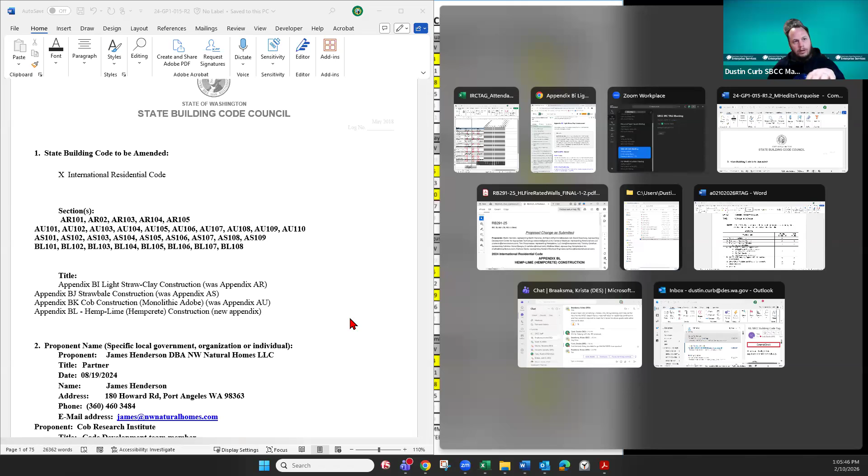So we will move to number 4 in the agenda. At the last meeting, we discussed an appendix proposal that got missed by staff during the Group 1 window. It's an IRC proposal that should have been included in the Group 2 bunch. We had some good discussion at the last meeting, and we needed some revisions to make these appendices fit the character of Washington. Of note, I worked out with Krista before sending this one out to the proponents, getting correct energy code references in here. So we have here all 4 appendices in text format on the attachments for today's meeting.

On the left is the R1 version that is posted. On the right, I have some additional edits beyond the energy code references by Martin Hammer, and his are highlighted in turquoise - they were uploaded today for the meeting. But first, I'll run through the energy code references and also these changes to the user note. The original proposal said to strike the user note that says it's not mandatory unless specifically referenced in the adopting ordinance. It's my understanding that we are trying to get these adopted statewide so they can be used across jurisdictions, so I modified the user note - the provisions contained are adopted in the state of Washington.

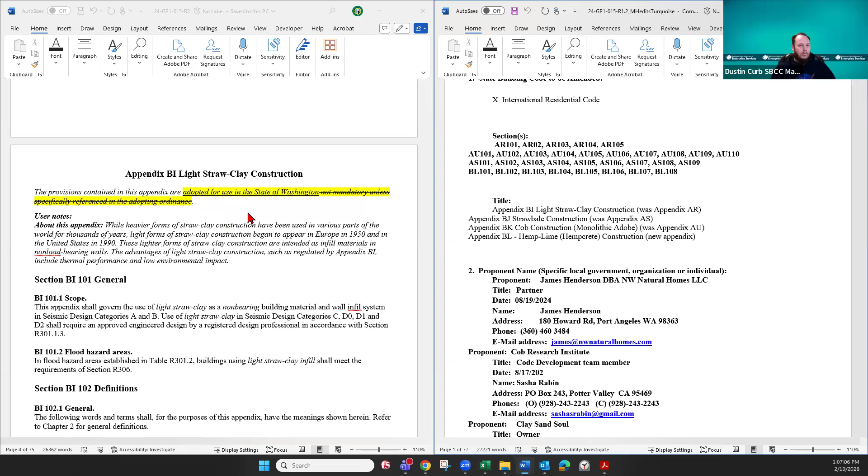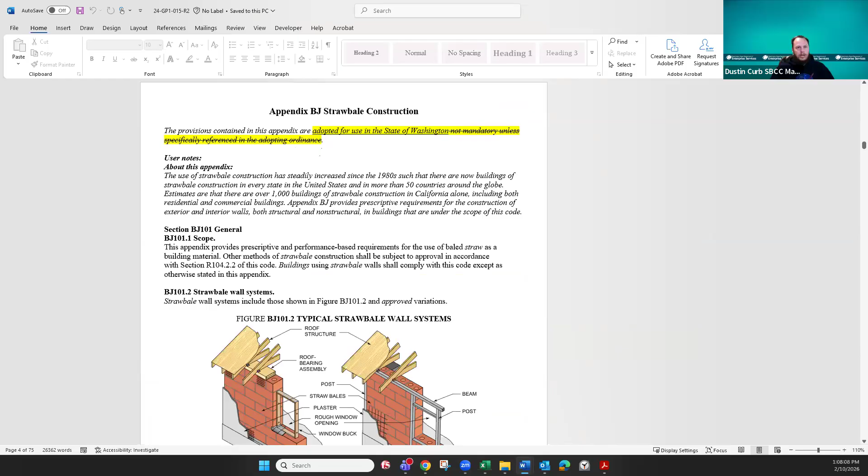Moving through here, the changes I've drafted are in yellow. We have section BI 104, thermal performance. I got with Krista on these to identify the appropriate energy code references, so you'll see those changes in underline and strikeout. One thing to note is a comment here from Krista: the residential energy code tables don't contain a value for mass walls, so they're required to meet the above-grade U factor from table 402.1.2. So it changes from the R value requirements to U factor requirements in accordance with the state energy code, and those changes are made through the other sections as well since they're very similarly written to reference the same tables. We have Appendix BJ, the adopting ordinance statements changed there.

We also, with some additional discussion with the proponents and with Krista, identified that the climate zones 6, 7, and 8 do not belong in this appendix because in Washington we have zone 5 and zone 4. I believe it's 4C and 5B in the tables for these climate zones. So striking the ones that aren't applicable makes this more composed for Washington State.

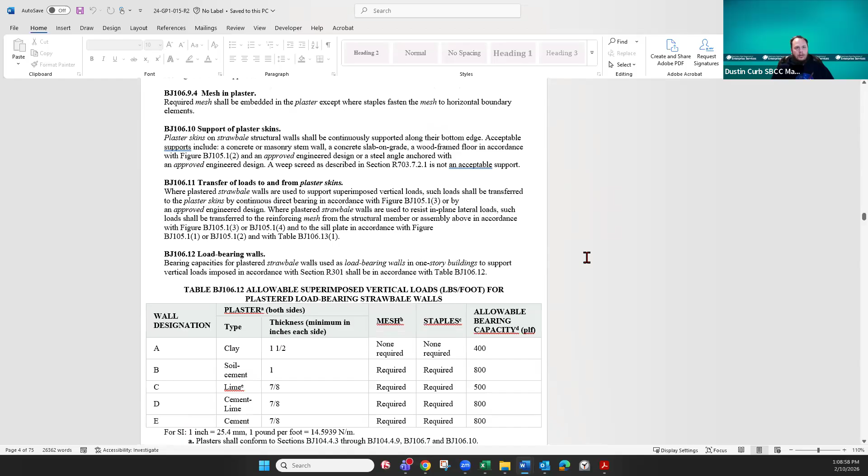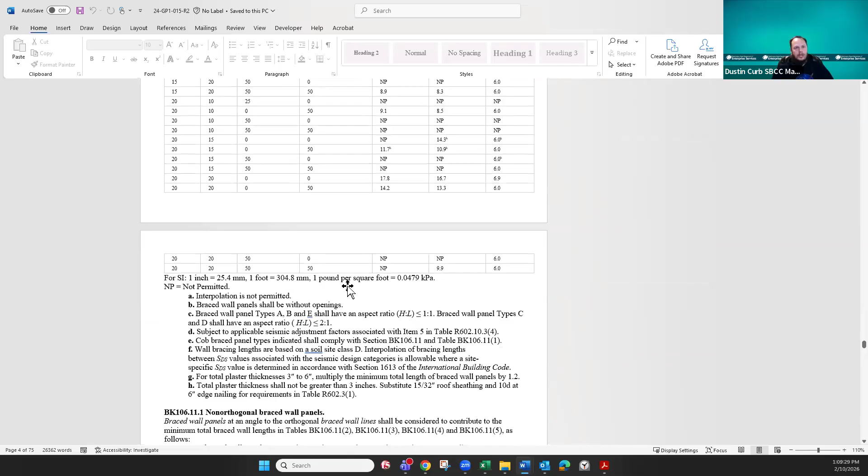We have some other climate zone changes here, trying to catch all of these. Another appendix, the BK Cob, the adopting ordinance statements changed. Then we have the other climate zone 5B noted at the table. This is just aligned with the Washington State Energy Code. There's not too much more in here, just a couple more highlighted sections showing the same types of changes.

And we're into the hempcrete appendix now. Yeah, the climate zone change, the mass walls change. I believe that's the last change that I was able to draft into here. And along with this, in response to some of the comments heard at the last meeting, we have changes drafted into this version in addition to these energy code changes.

And I'd like to maybe turn it over to Martin Hammer to discuss these. Martin, if you like, I can promote you over if you want to share any sort of screen. I have this document on screen on the right-hand side, and I also have the ICC code change proposal RB 291, two different versions. If you want to present those, I'd be happy to pull them up for you as well.

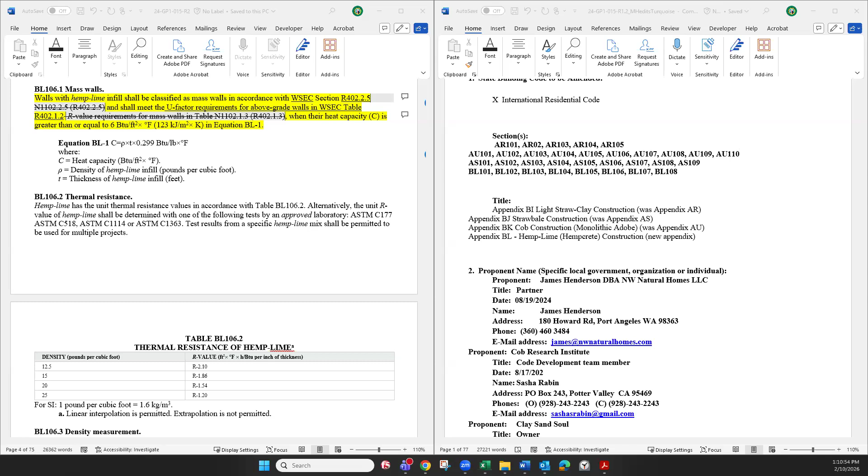If you could pull those up, that would be great. You want to start off with those? Sure. Well, you want to go with the comment 3-5 one or the final? Oh, you're talking about the ICC document. So how about I pull down this one? I'll just make this screen dedicated to what we got going on.

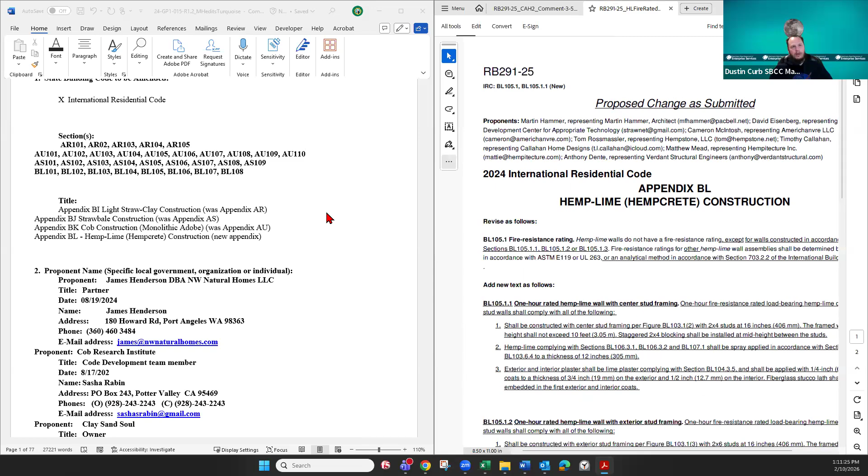So this is Martin's updates in addition to what I was just showing. They'll be highlighted in turquoise. And then I have the ICC code change proposals here on the right-hand side. So if I'm ready to show any of them, would you like me to scroll down to the first change you have in your proposal document? Yes. Okay. All right.

Between Dustin, and I forget the person mentioned regarding energy code, and myself with my colleagues, we've in combination, I think, addressed all the issues that were both discussed in the last meeting two weeks ago, and that reflect differences or make the code language compatible with Washington State's codes and conditions. So, as Dustin mentioned, I submitted a document with proposed changes in turquoise. Before I go through them one by one, I'll say that they fit into a couple of categories.

One is this one you see, the first one. Each of the four appendices now has a special inspections section. We discussed that last meeting. And then the others, in terms of category, we added the hemp lime tested fire resistance rated assemblies that were tested and recently approved in the ICC code development process. And there were a couple locations where the International Residential Code or International Building Code are referenced in the IRC appendix, and I changed 'international' to 'Washington State'.

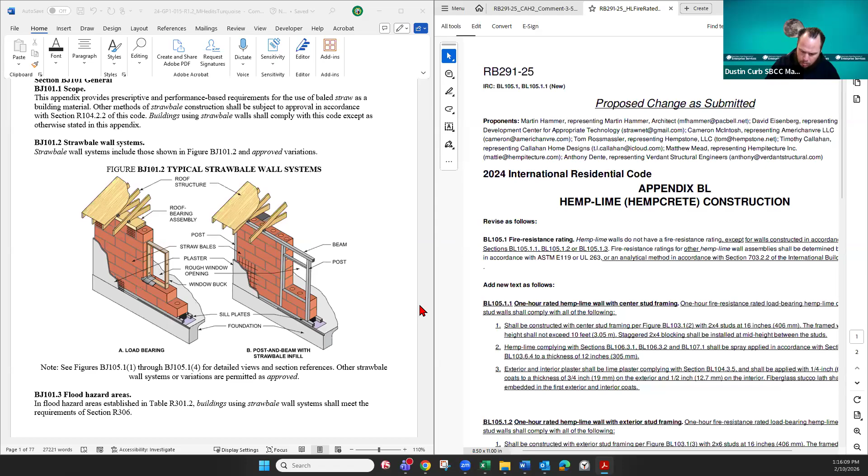Okay, so anyway, a bit of an aside, but if you can keep scrolling. Yeah, one moment, let me take a note on this as well for my records here. All righty. I mean, if they look more like that. Yes.

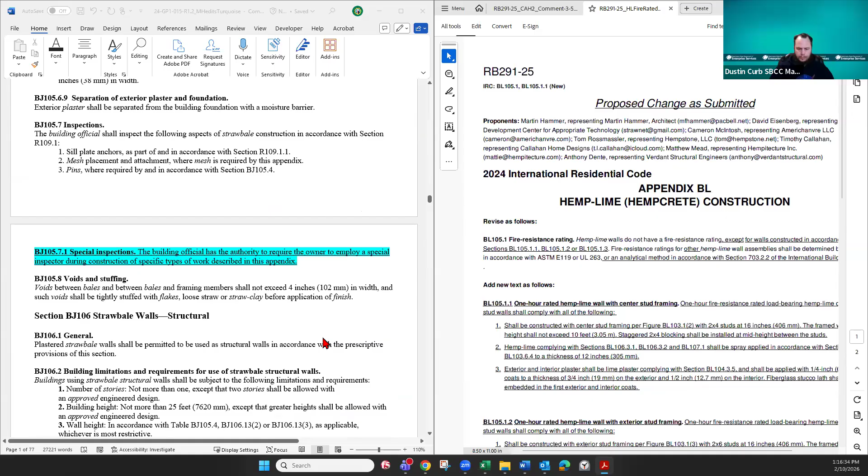There's okay, here's another special inspection section. Exactly. I'm going to keep on rolling. Yes, keep on going, yes please.

Okay, it's a Washington State change. Yeah, there's an example of changing international to Washington State. And another one similar.

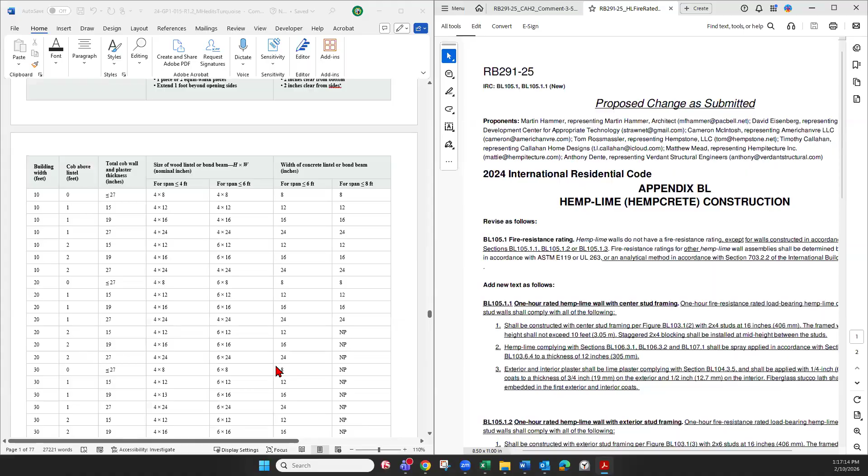Another special inspection section. International to Washington State, same thing. One more.

And if you can go back to the beginning of the hemp lime section, thank you. While we're here as well, I just wanted to say that I've discussed this with David Eisenberg, but I think all of us, I definitely appreciate the language that you're proposing here. I wish State of California would use the same. We've had some difficulties with them not being so clear as this is. But I just wanted to comment that I think this is the perfect way to say what you're trying to convey to the code user. So thank you for that. And you can keep scrolling please.

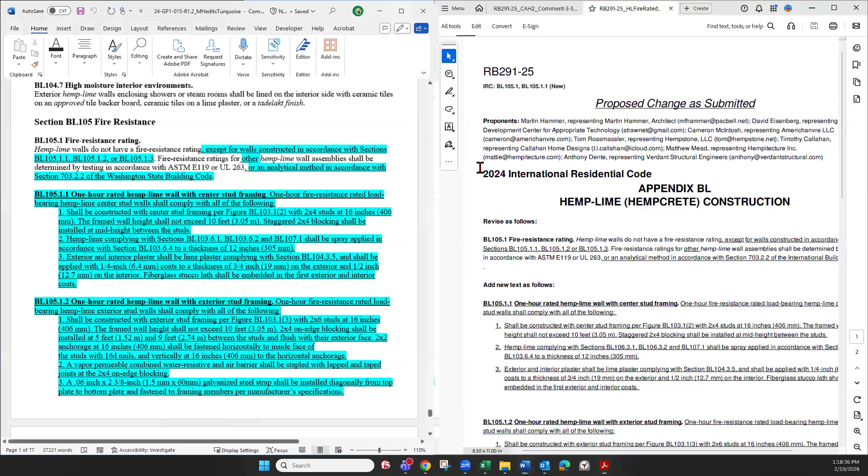Again, the special inspection section. Okay, now here is certainly by far the largest amount of code language, and this is what was recently approved in the ICC code development process.

The current IRC, well you can see the difference between, especially in the first section where it says hemp lime walls do not have a fire resistance rating. But now with the recent approval, they do, at least this will be in the 2027 IRC.

And I appreciate the tag's willingness to take this approved language that reflects recent testing in the last year or two that was done on 3 hemp lime wall assemblies. All of them performed very well and achieved a 1-hour fire resistance rating. So that's what this language in turquoise here reflects, those 3 assemblies.

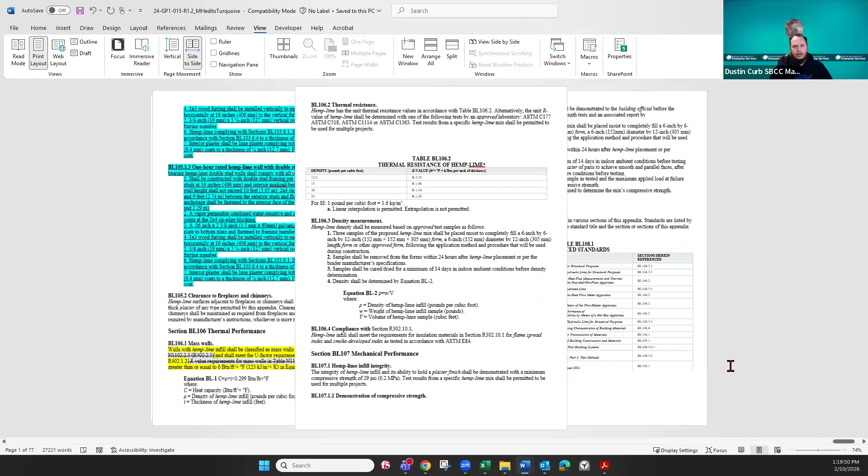And I think that's the last change you have in this document, correct? Yes.

I guess to the tag, is there any sections you'd like to discuss? I feel like the one we have on screen probably might garner the most, but Quinn?

Yeah, so I have one comment and one question. The comment is that the proposal at the ICC level hasn't been approved yet. So that's just a simple correction on the statement because April is going to be the public comment hearing. It did pass the committee action hearing number two, but it hasn't passed the public comment yet. So that's just a minor correction.

My question is on section BL 105.1.1, under item number two, for the spray applied. My question is on the inside or outside? Because typically in 302.1, the requirements for a rated wall would be it's protected on both sides. So I'm curious if this test was done on the exterior, interior, or both. Question for Martin. Oh, okay.

So Quinn, 2 points. First, to your first point, it was approved, but in the committee, the second committee action hearing. So I should have qualified that. Approved was the right word, but it hasn't been approved at that final step, which typically, well, the final step is in a couple months in April at the ICC hearings in Connecticut.

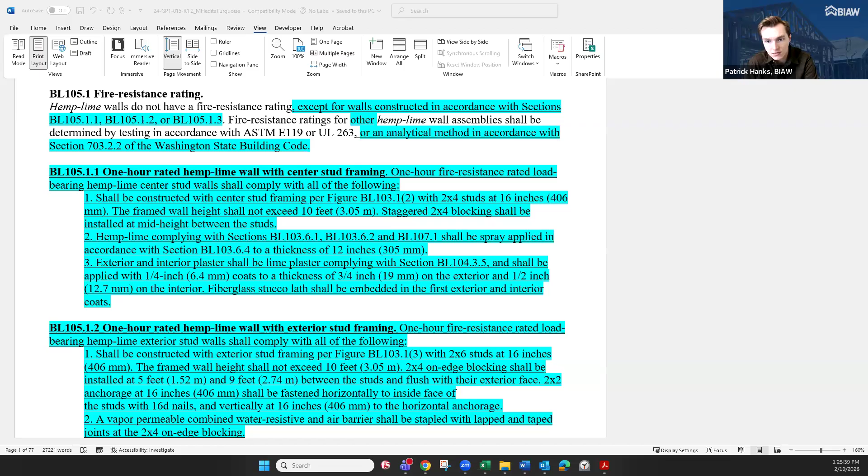Patrick: one other thing we brought up last meeting is I don't know if we want to do this individually for each appendix, but if we move forward approving them, we'll need to edit WAC 51.51.003, which is the chapter 1 part of the state IRC that has what appendices we've adopted. So I don't know if we want to include that in each individual proposal, or just direct staff to include that in a final motion if we proceed with these. I'm happy to bring it in as we get to the end of this one. I can pull the language over and keep it in and put it in the draft as well.

Annie: just want to circle back around to seismic design categories. As I understand it, light straw clay and hemp lime are non-structural, so whatever system works is what works. Straw bale specifically applies to A through D2, and cob applies to A through C seismic design category. What are we doing about those silent seismic design categories? Is there just an assumption that there's going to be an engineer doing it, or are they simply not allowed in those zones?

This is Anthony with Verdant Structural Engineers. It's cited that an approved engineered design is required, and if that approved engineered design kicks you into the IBC, and if that is an alternative submission, that person would need to go through IBC 104.11 alternative submission for that. But if it's a code compliance system they're using, say moment frame or brace frame, then obviously an alternative submission would not be required. But an IBC approved engineered design is required, and that's cited for all of them. So there is not an unspoken category that doesn't relate to that.

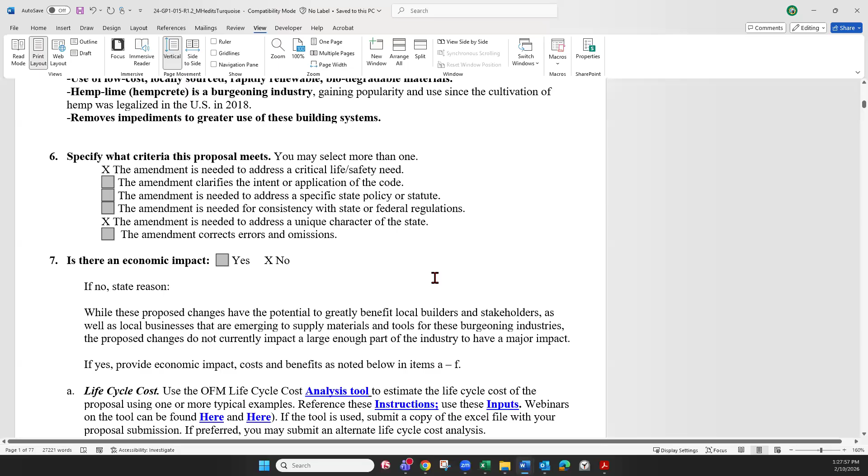Okay, thank you. I did notice that the wall panel types in the straw bale and the cob are actually A through E, which can be a little confusing because our seismic design categories are A through E as well. We need more symbols for variables. I agree, it's not ideal.

Any more comments, questions from the tag to the proponents?

So this is a good screen to look at, Dustin. In BI 101.1, it just talks about the use of light straw clay in seismic design categories C, D0, D1, and D2 shall require an approved engineered design. To me, it's silent on E unless it's somewhere in this section. If we can make a statement on that—I believe there was discussion last meeting, and I meant to follow up on this. Previously, the IRC did not apply to E, so the code as a whole is silent on E. But I believe there are some allotments for that now, and we could either put E at the end here, or no matter what we say, it's the same thing: the use of language in the code here saying approved engineered design.

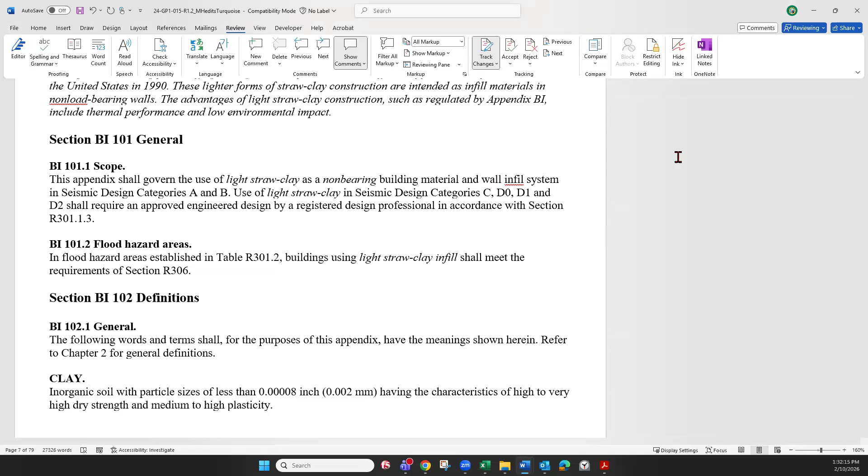And then I'm assuming that there's other locations in this document where this same change needs to be made. Yes, and I can find those right now if we want to move on to the other question.

Angela, I just had a question. So seismic category E is being introduced in the 27 code, correct? But we're bringing it into the 24, is that right? Or did it actually come in the code? It's 24, it's coming in 2024, and Washington State does have a couple areas.

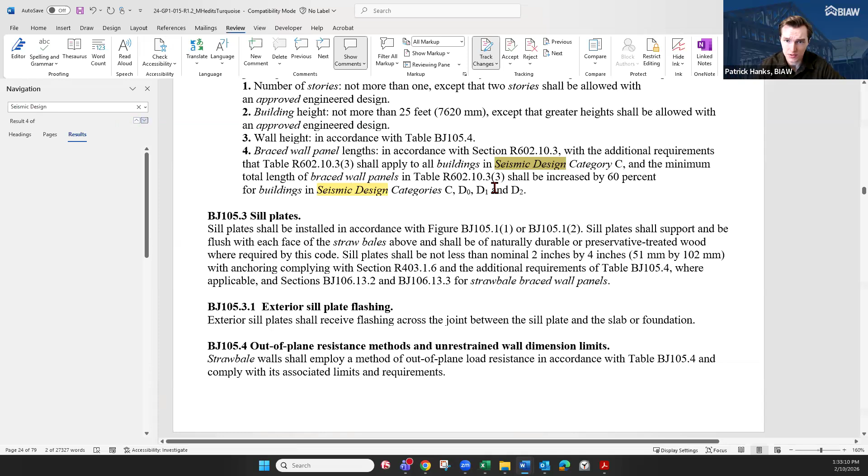The other parts of the code allow them to build, I think, to D2 if they do certain things, but it's probably better if we just clarify in here. We just include E.

That's what I was wondering, was changes were made to this appendix for the 27 code by these proponents, but they didn't change this or vet E going through this. So I just was curious why, if they were already making changes, they didn't also actually make that change and get it vetted at the national level. But that's just a question.

I don't think it comes up very much because most of the country doesn't have E. It's just us, where it's like, we care about this because it affects us.

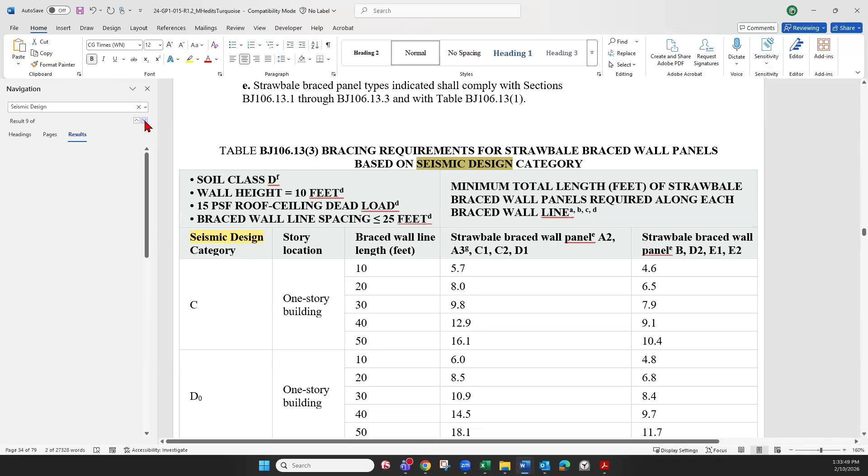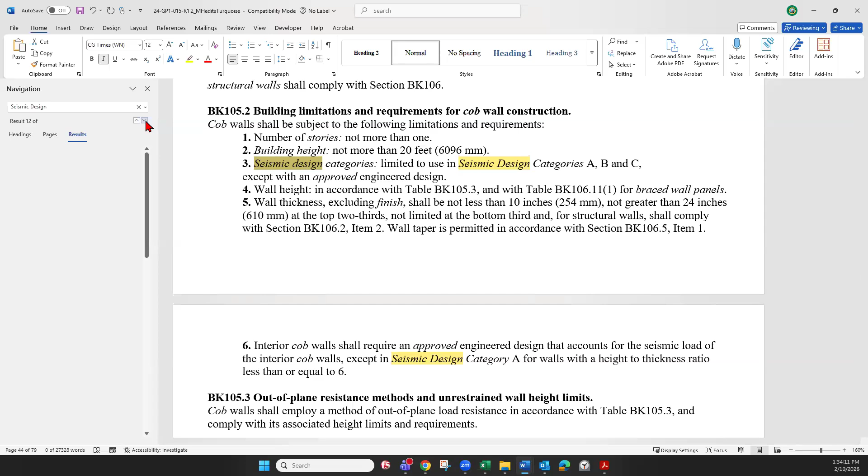Also, Angela, maybe the more important thing is that there's no vetting required to write E after this, because it's essentially saying that you need to get an independent engineering design on this. So it's not approving any structural applications of these appendices for use. In fact, it's explicitly saying you can't. You need an approved engineered design and can't use the structural tables below for E. So no vetting required.

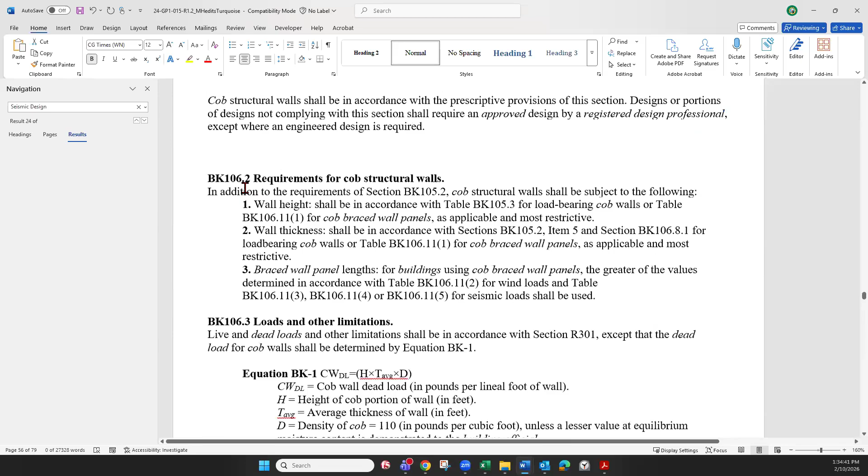BJ 1052 is BJ's version of this category, and it's item 4. And since you're in BK 1052, it's the number as well, and it's item 3. Here, it's actually more simple.

I don't know if we actually need to address it here because it simply says, like everywhere else, an approved engineered design. But if it's preferred by the TAC here, we could just simply use the same language. I hadn't actually realized that there was slightly different approaches to saying the same thing between these appendices until this conversation.

Does anyone care about leaving item 3 just simply as it is versus listing out? I mean, it makes sense the way it is to me. I think that just comes down to making sure that people are trained and understand what it means.

You can probably just go, Joshua. I think Dustin's editing the document. Perfect. All right, thank you. Angela's not watching.

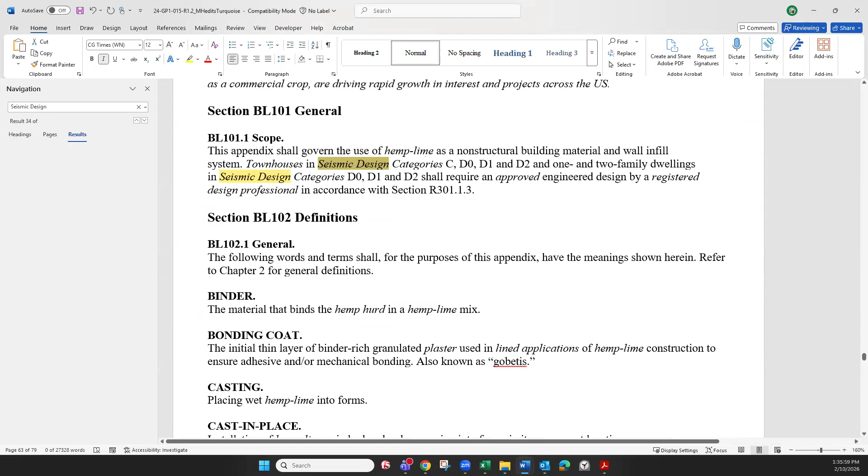I was just going to say the one thing that seemed a little different, unless I'm not tracking right, but in the cob houses there were some prescriptive standards for A through C. So I think that language makes sense because I was saying we are allowed A through C, or you need an engineer, whereas I believe the last one was any of these categories, you need an engineer, period. So I think the cob house made sense. I was just voicing my support for that.

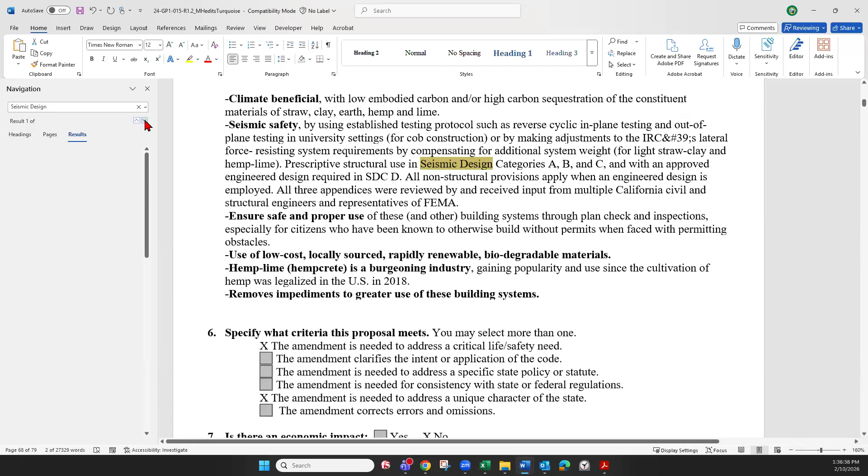Thanks. Yeah, and Martin, did you have something? Yes, a few things. First of all, I concur with this approach that we're doing right now. I think this is the right solution, and I did verify for myself that category E is in the 2024 IRC, which was published more than a year ago.

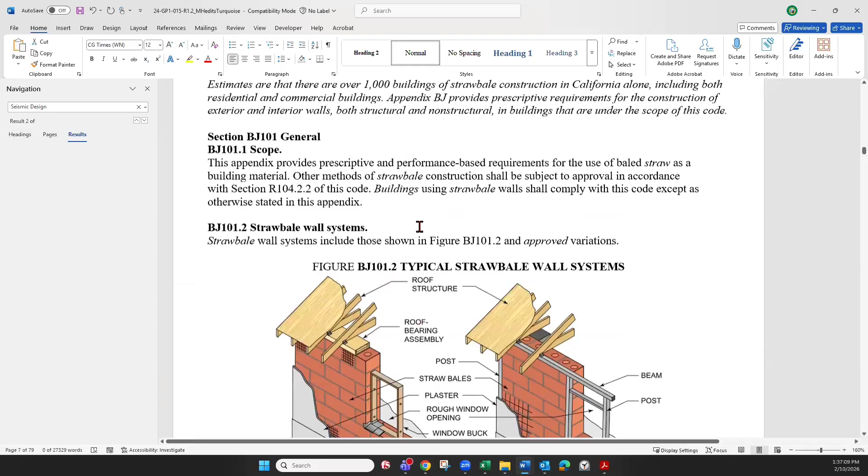So, and then if in BJ, if you can go back, well we have it for BI. In BJ there was one more change where E is needed. You need to insert E, I think, or I might be losing track here. Hold on a second.

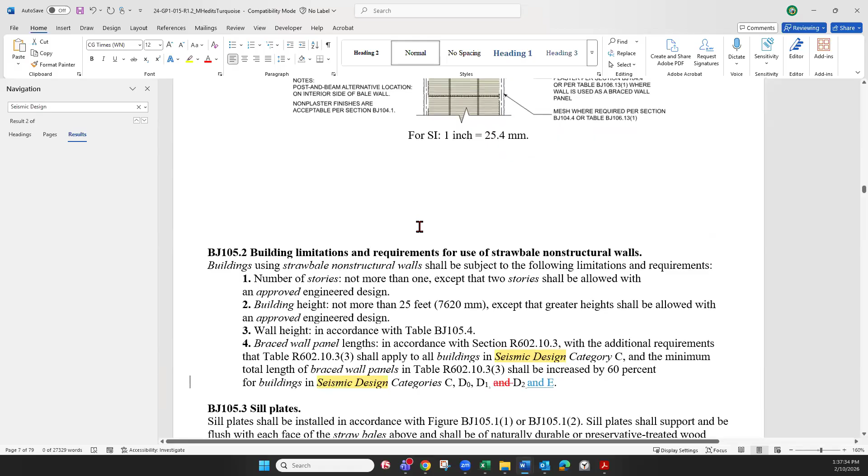Okay, so well, BJ, it sounds like we're in agreement that the way it's worded we don't need to call out E, or that was BK, Martin. Okay, we were... no, but I mean I'm just wanting to clarify for myself, even in BJ 102, the way that was worded, it sounds like we're in agreement that there's no reason.

Yep, you had it right there. Well, that was 105.2. Okay. Yeah, in 105.2, misspoke there. Yeah. And this is right. Okay, yeah, it needs to go there. And there you have it.

Okay, that's great. And then we were last in BK. Is that right, Anthony? I think they're all addressed. I think I watched him do BL 1011. We all looked at BK 1052 and decided the change wasn't necessary. We were just in BJ 1052 and we started in light straw clay, BL 1011.

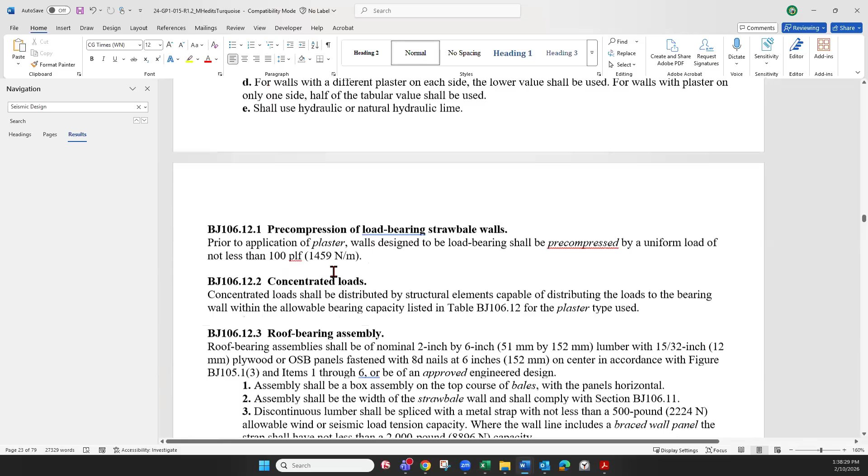Okay, there was one where we had different seismic design categories for one and two family dwellings versus townhouses. That's the one I'm trying to get to. Okay, I'll find it here.

In the meantime, Micah, did you have a comment? Yeah, thanks. I do want to get something clarified for the record, especially when it comes to the scoping of these individual items for structural design. There's been several comments that say if you're not meeting the prescriptive approach here in the appendix, it's going to trigger structural design per the IBC, and that is not the case. It sends you to R301.1.3. In there, it doesn't automatically trigger that IBC structural design, which is more robust. It says that is permitted in these instances where these designs exceed the scoping of the IRC.

But it says that once it does, it needs to be done per accepted engineering practices, but it does not trigger the more robust IBC structural design. So that may need to be corrected, and that may need to be specified in these appendices or in R301.1.3 - that if you're doing this, yes, we're getting some accepted design criteria, but I think your intent here is to not have an alternate means and methods, which you would have to go through. The intent here is to use these appendices and the residential code. Again, it's not a requirement that we trigger IBC structural design, not even in 301.1.3. That's permitted and optional. So I think we're missing something - there's going to be a gap here in the intent of what we're trying to accomplish with these appendices. Thanks.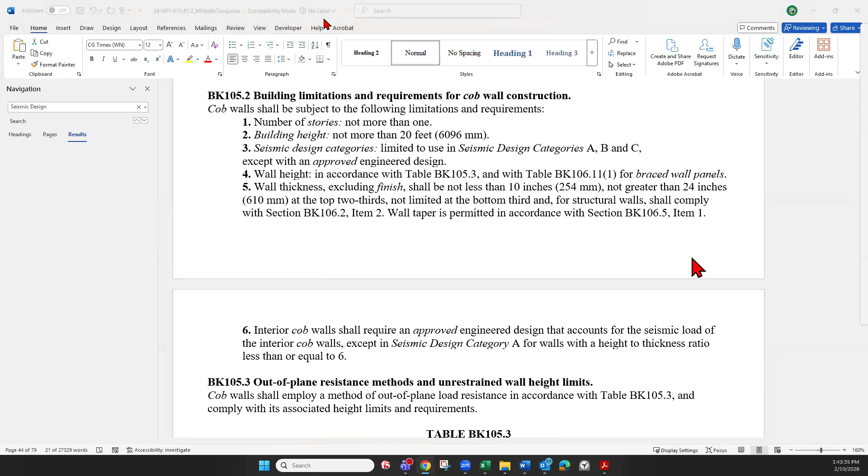Anthony, I appreciate that, that's where I was getting to. I think that section is being used for justification for changes, but the justification stated doesn't meet the code language, or the code language doesn't meet that justification. I believe that was in relation to questions on some structural design for specific seismic criteria. So I think you're right, there may need to be some type of modification in R301.1.3.

I actually thank you for that. Looking at this now, the final sentence here - engineered design is the title, so that's the term being used in these appendices. And the final sentence, getting in, thank you for the person doing the screen sharing - it says engineered design in accordance with the International Building Code is permitted for buildings and structures and parts thereof. So it does point you to that.

Yes, it does, but it's not the automatic trigger that was indicated for some of the justification when I was listening to testimony. And again, if it's not relevant to other people I'll stop talking about it. But that was what I was hearing - that you're automatically going to get that IBC structural design, when that is not the case. That is an option, it's not a requirement. So I want to make sure that's clear for the structural designers or code officials who have concerns.

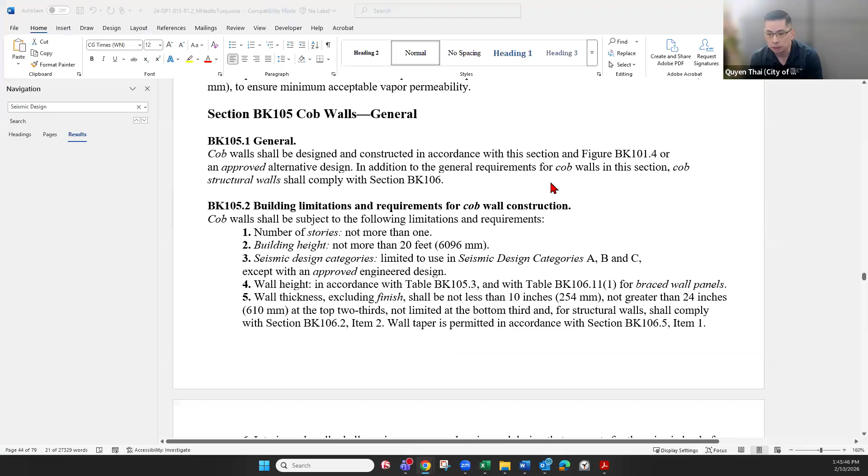So one of the things I saw earlier, and this is what I tried to mention in our last meeting, is before we start putting in seismic E and additional new text, be careful that we might not break the code. Earlier I saw that you guys added E to BJ105.2, but that whole section references table 602 for the tables for the type of brace walls and stuff like that. The problem is the tables in 602 only go up to seismic design category D2, especially when you're talking about the factors, right? There's additional tables not referenced, but there are factors - for D2 you've got a factor of 1.2 or 1.4, depending on the total length. So by adding E, you're going to confuse which factors we start using. That's a question for the structural engineers, but again, chapter 6 only goes up to D2.

Okay, in this one case, thank you for bringing that. And this is, of all the things we've looked at and considered for E, the unique case in which we're adding a 60% increase - shall be increased by 60% for buildings in D1. We probably should say, and not, and you could say with approved engineer design elsewhere, but either say and...

Well, that 60% is based on that table, right? Which is your base table. And then the table after that is your factor. So let's say the table says 10 feet, and then the factor is 1.2. But now this 60% is based on that initial base table of 10 feet - it doesn't include the factors.

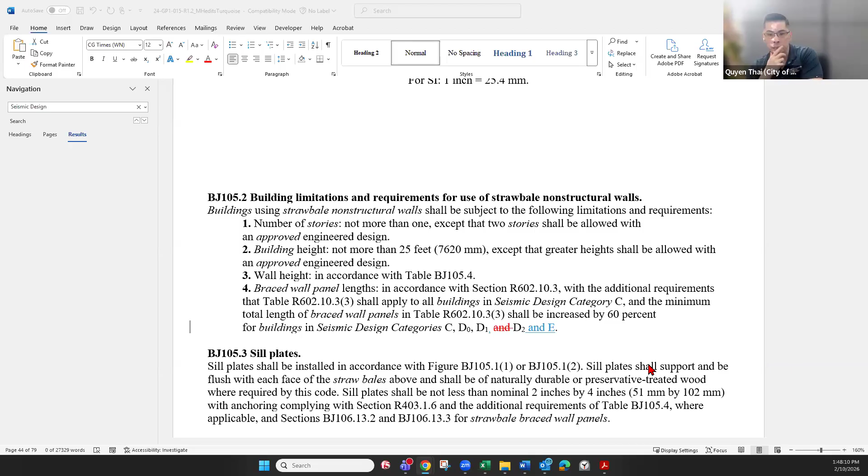This is Martin. I think it's a really good point, Quyen, I appreciate you bringing it up, and I agree with what Anthony said a moment ago. Of these various places where we're looking at inserting E, I believe this is the only place where it's not appropriate. Or maybe we just write 'or comma D, not comma, or with an approved engineered design in E,' carrying the same philosophy we've taken for the others.

Anthony, I'm trying to remember, is there another place where we've already changed it to require an approved engineer design for E in BJ? Apart from this, I'm not finding the answer to your question. Hold on. Yes, BJ 1052, which is where we're at.

Just a suggestion, I'll jump in because I'm rude. I think if you just included that information in the scoping of the appendix, it would cover any areas where E is not included in the list. That would be acceptable to me and maybe others, and you wouldn't have to identify it in every location. Thanks.

There isn't another location in BJ, Martin. That suggestion sounded reasonable, I might need to hear it again.

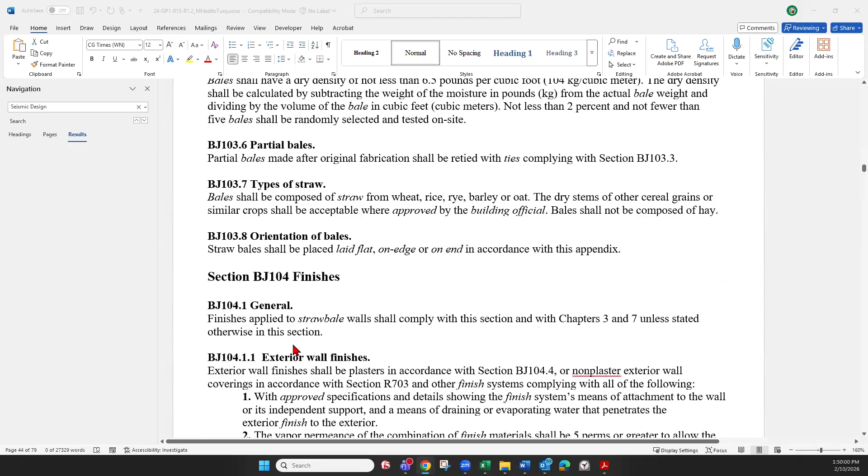My suggestion was if it's covered under the scoping sections, in other words, the first couple sections of your appendices -- I'm not sure if it's in this one, I don't have all the documents up. But if the seismic design categories are covered in the prescriptive approach, or if there's information saying if it's not here in this appendix, not in this code -- this may be the only one where you need to add language for E that's outside of the scoping somewhere. But that was just a suggestion.

It is interesting. In this case in particular, it's saying use these tables, and it doesn't say what to do for E. But I feel that throughout the code there must be tables that address seismic design categories and don't go all the way to E. I'd be surprised if there wasn't a precedent for, well, if we don't say E, you just can't use this section for it.

But I respect the opinions of being worried about silence on this. I would imagine the code in general has a silence problem.

This is Martin again. My instinct on this is to say something about E wherever the other seismic design categories are mentioned. Otherwise, I'm afraid it would get lost, with someone not knowing the E issue is addressed elsewhere.

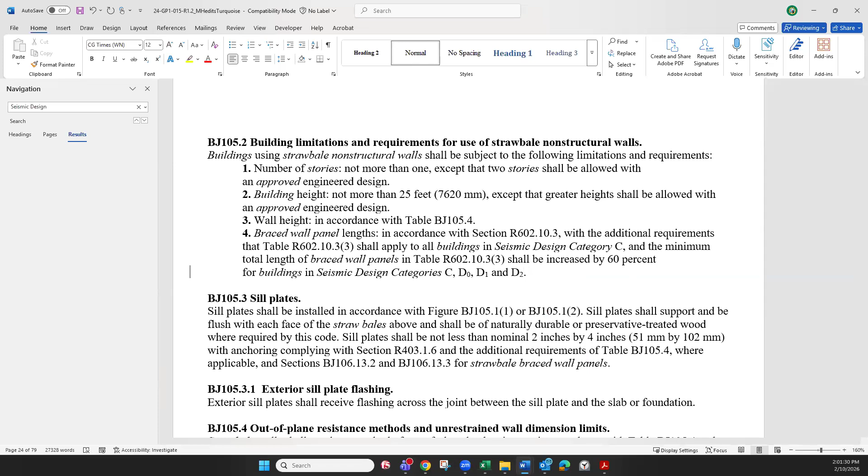Yeah, so I have two things. More of a generic comment about this whole process. When we're dealing with the IRC, the reason I think, for someone like me representing a jurisdiction, is that IRC is very difficult to modify from a local jurisdiction level. We always have to go through the State Building Code Council to make any changes. Keeping it as an appendix makes perfect sense for local jurisdictions to manipulate whatever they want. So that's just an overall comment for this process.

So yeah, I agree with this particular change to keep it the way it was earlier, like you're showing on the screen right now. My question I had earlier is going back to the fire rating, with that whole checklist of spray foam and things like that. Has that been tested to ASTM E119 and UL 263? Is that a tested procedure? Yeah, okay, all the fire ratings have been ASTM E119. Got it. Okay, and that's all I need to know.

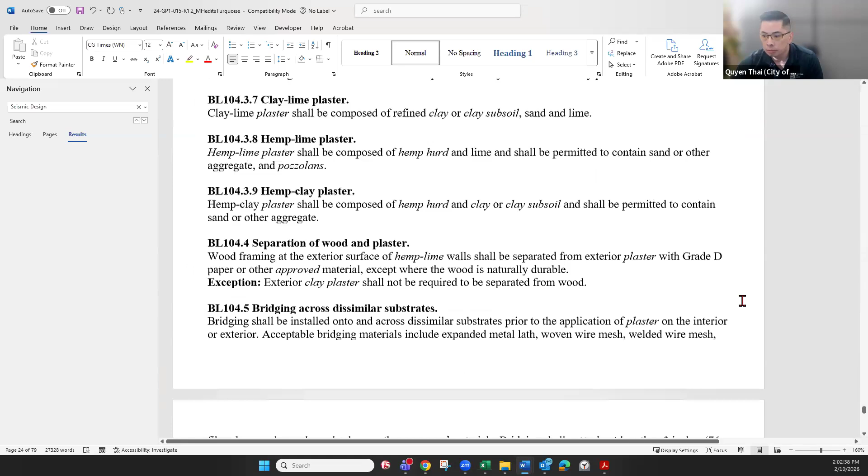And this is Martin. If I can, in the interest of reaching completion in an acceptable manner, I personally am okay with being silent on E for Appendix BJ and adding E to the others as we talked about. But I also, in the bigger picture, because this has been mentioned a couple times in the last few minutes here, I want to really encourage us all to approve these, to adopt these appendices.

I think not adopting them is, notwithstanding some of the issues we've talked about, I think we're correcting most if not all of them. I think not adopting them causes more problems than adopting them. And reasons for that have been described a little bit here. But there's definitely a perception, at the minimum, that the appendices in the IRC are not as well developed as the body of the code.

But these appendices have been very well developed, relying on extensive testing. Some of them have been in the IRC for 10 or more years now, and being used in some states as adopted into essentially the body of the code. And we've even talked about bringing them into the body of the code, and I think they're to that point now, but there are other reasons to not bring them in that I don't need to elaborate on at the moment, about keeping them kind of intact as a group in the appendices.

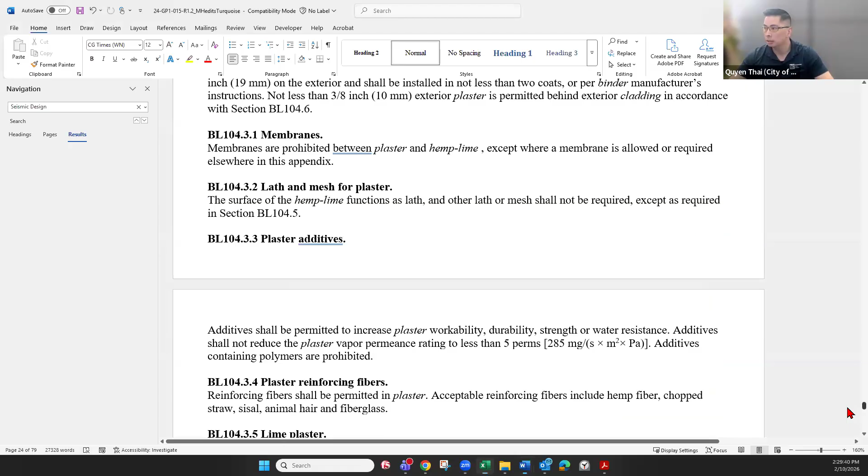You mean as shown on the screen, correct, with the amendments proposed? Yeah, of the changes we made today. But is the motion just to make that change, or do we want to approve it and make that change? Do we need to approve it first? You don't have to approve it. It's just, do we want to take two votes or one vote? That's a good question - I'm asking Dustin, do we need to do both or one?

We can do it as one, and I'm attempting to make the language change right here, and then I can make it globally across all 4 appendices. Okay, Ken, so I'll do it as one motion to do both - that we adopt what we did today, the amendments we did today, and to make it ready for adoption by local jurisdictions.

Was that in revision 1? All of the additions, or just the E which was added in today's meeting? The E was added in today's meeting, and now what I have on the screen here shown with track changes is being added. So it's in addition to R1. R1 was shown and then we revised it, revision 1. This will become R2, what we'd be approving here today. But we don't have a document that shows all of our changes.

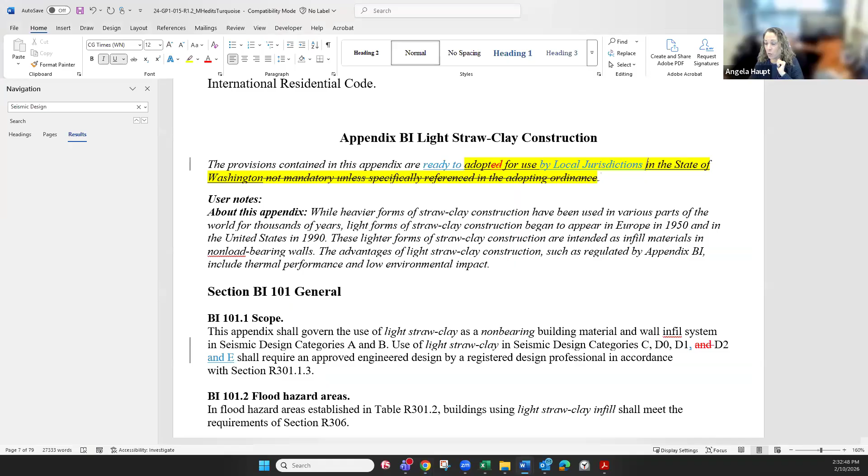Would it be helpful to maybe go through the document really quick and show what you did change today? Yeah, be happy to. Let me get this loaded. Sorry, while we're talking, Annie, did you have something else?

So by doing it this way, Dustin, where you're introducing this ready-to-adopt text under the appendix name, we do not need to make any modification to R102.5 exception 1. I don't believe so, because in there it mentions straw clay or straw bale construction, one of those appendices that is ready to adopt. And so it seems appropriate that we'd be adding the other 3 to 102.5 exception 1. That would be a relevant change.

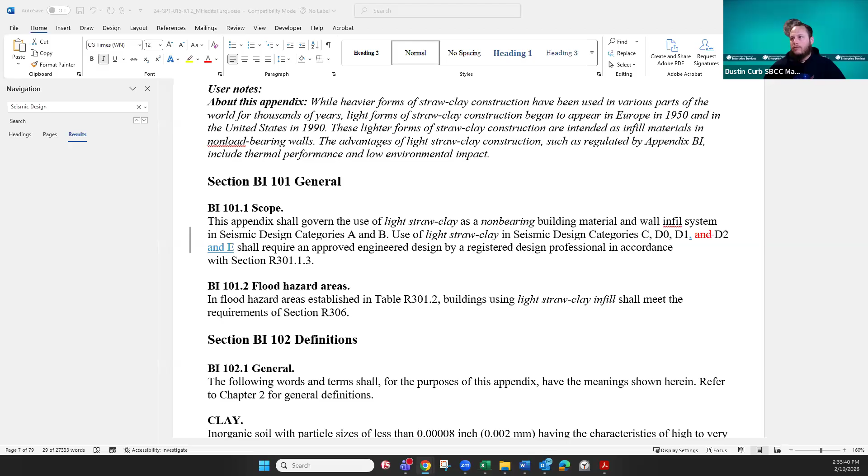Let me pull that language onto the screen for everybody. I was also just going to make sure he goes and edits WAC 51-51-003. Okay, so with the change we're making right now, I don't think a change in WAC 51-51-003 is needed because they're not adopted statewide, but this one in 102.5 is relevant. I meant unchange it because I thought you had changed it before, but if you hadn't changed it - no, I got it dropped in there to start making the changes, and I didn't ever get back to it.

So let me pull out 51-51-003. Something deletion. All right, so these appendices, B...

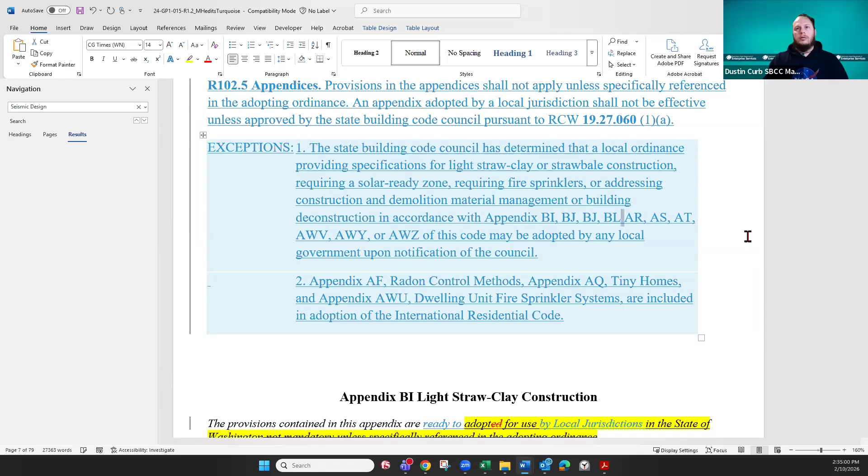So it's Appendix BI, BJ, BK, and BL. Let me make this more clear. And then I'll revise my motion to include this change you're making right now - adding the appendix to 102.5. And it would require some additional verbiage up here, just to make it the same as everything else we have, which is the naming of the appendices right in front of each appendix letter. I can type that in there now if we want, but it's also something I can clean up after this meeting. Yeah, it's just a coding correlation issue at that point.

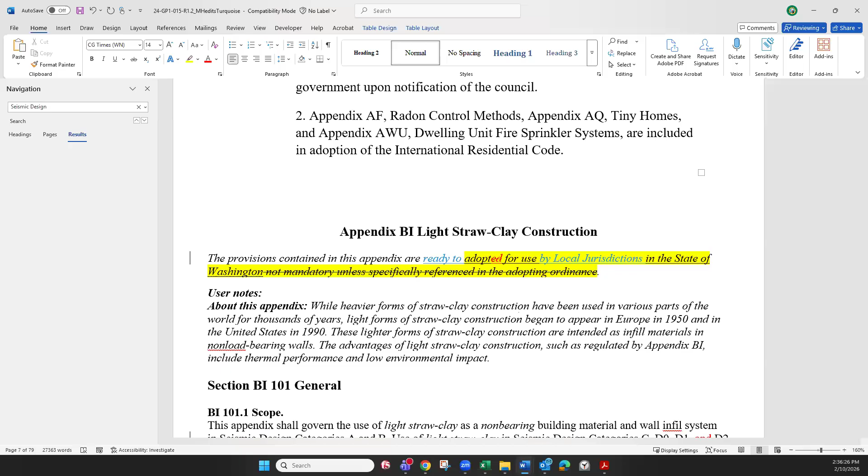There's an attendee with their hand up. Oh, David. Yeah, I just wanted to point out there's something in the 'ready to' - it says 'are ready to adopted for use.' So it should say either 'to be adopted' or 'ready to adopt.' Anyway, that's a track change for everybody to see, that red strikeout language. Oh okay, oh yeah, I see it now. Okay, so that's just a minor thing. Thank you. Okay, so do I need a second for my revised motion to include 102.5?

Yeah, whoever the second was, did they agree? I guess I chimed in as a second, but I think there was another second as well. I'm fine with what you're doing. Okay, I can triple if that helps.

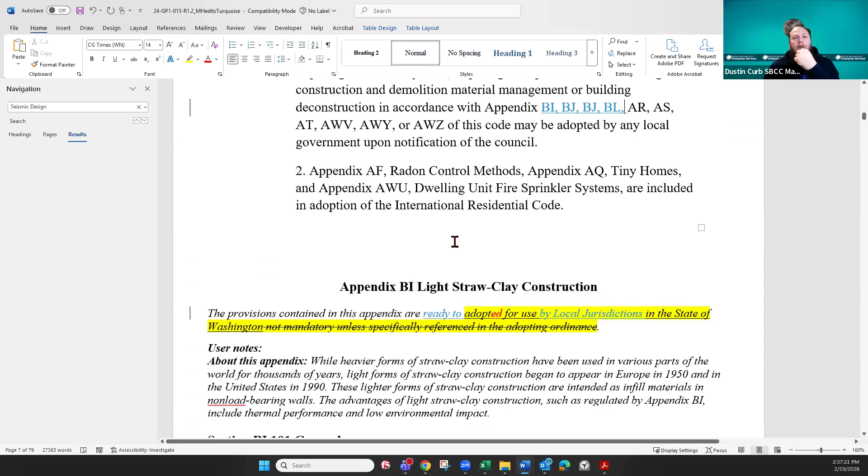All right, so running through the changes made to the documents posted online today. We just added this 102.5 amendment to make it clear that these appendices are available to be adopted with just notification to the SBCC. Staff will finish the correlation into here to name these appendices in this section above. BJ's in there twice, and I think you're missing BK. Oh, you're right.

Thank you. And then Ken, you have your hand up? Yeah, so are we amending the proposals for the 2024 IRC, right? 102.5? Yes. And the 2024 International Residential Code 102.5, is that correct?

Let me double check. I'm looking at 102.5, and the 24 is partial invalidity. Am I looking at this wrong? Probably not.

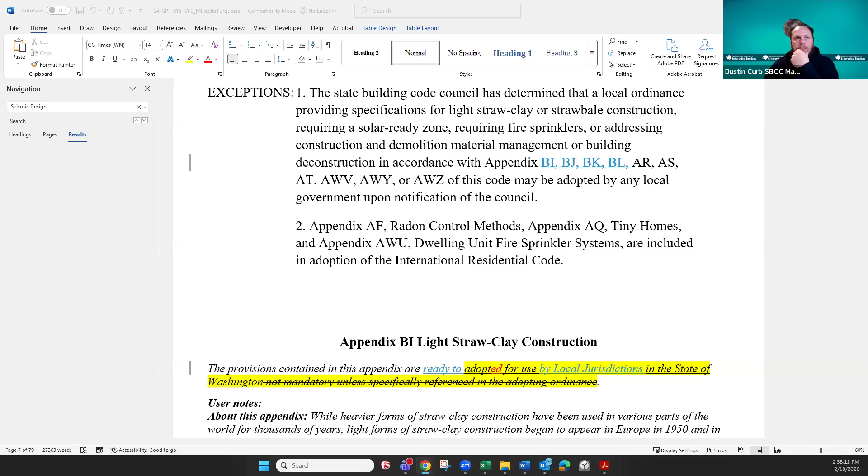Yes, so you've got that right. Give me a moment. Micah, you got your hand up? I was going to say, I think Ken is correct. I think it should be R101.2.1. But I could be wrong. We can verify, but I think that's what Ken's alluding to. That's accurate.

So I'll have to double check this one. We should have another code change going on this one to bring this into the correct location with the previous work done by this tag. But just for clarity's sake, we're going to change this to 101.2.1.

Yeah, all the language is wrong in there. It's different than 24. So, but we have a state amendment on this one, so this one might be carrying forward. That's correct. Yeah, we specifically amended the language itself.

So looking at the 24 code language, I don't see a need to change that. If we have a code change proposal already by this tag for this section, we should go back into that code change proposal, should we not? No, it's not a code change proposal by the tag. It's an existing code change already that's carried over.

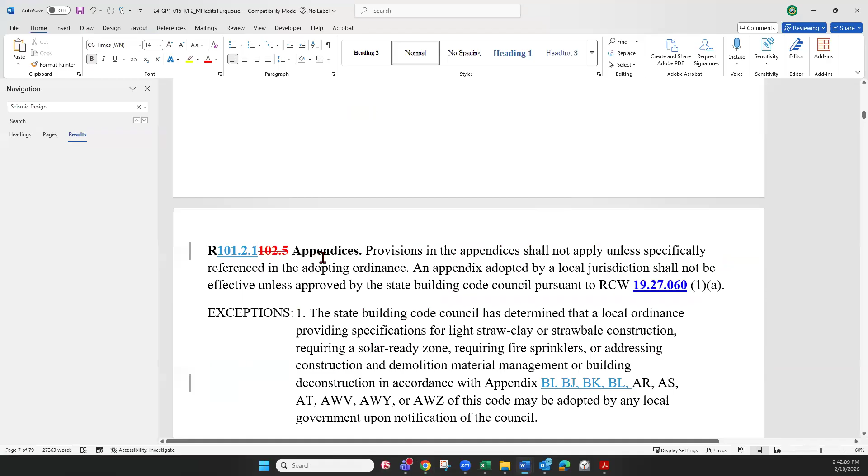There you go. I'm just bringing up an editorial issue, that the red should show in red if we're going to make changes. Quyen, I hear you mentioned that it's gonna get updated. We might as well make sure it says the right thing that we're crossing out and changing.

I think that's editorial in nature, but we've always missed the editorial over the years, and so I'm trying to get it straight now, because otherwise people are not going to fix it. Get it straight during the code change process, then we hope that it gets transmitted correctly into the WAC.

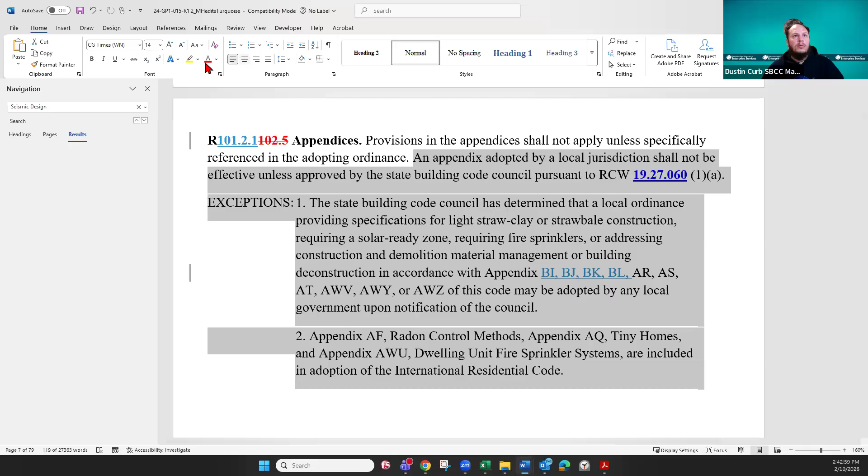So I think for our intent and purposes, the language that's currently in the 21 is better than the model language in the 24, because I do like that we're referencing in the adopted ordinances. So I think that's better language for what we're trying to do with the appendices, if that makes sense.

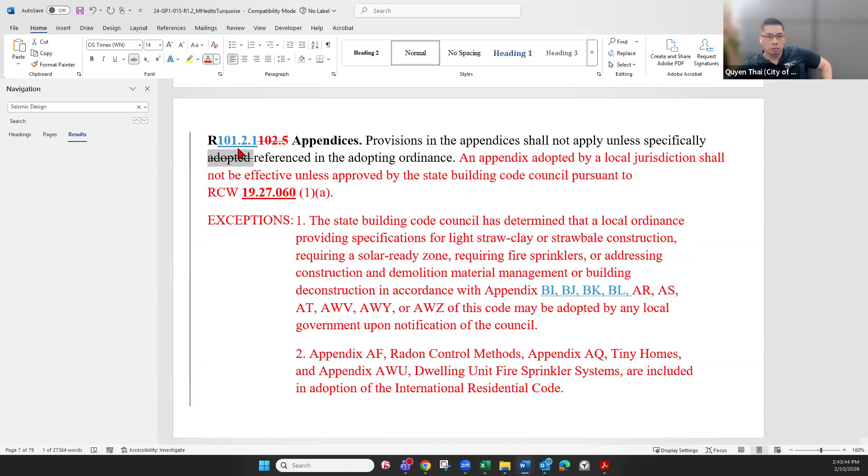So this shows text in red as the existing state amendment. The strikeout blue text shows the change from the 2024 code to what's existing in the state amendment. And the track changes shown here indicate the location change from 102.5 to 101.2.1, and also the inclusion of the 4 appendices included in this document.

And I'm good with that. Okay. And then for this one, I'm gonna load that one up.

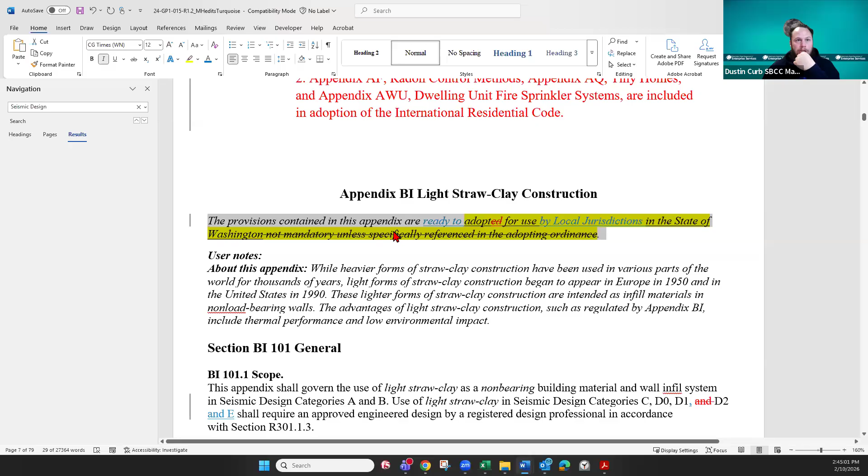So just to re-review the stuff we've done here today, we hashed out R101.2.1 for the 2024 code. We have changed the provisions contained in this appendix to be ready to adopt for use by local jurisdictions in the state of Washington, and I'll update that as we go through the remaining appendices. Here in 101.1, we have added seismic design category E to the scoping of this appendix.

In this appendix, BI 103.6, we've added a special inspections provision. And then in BI 104, staff went through and changed the references from Chapter 11 references to State Energy Code references.

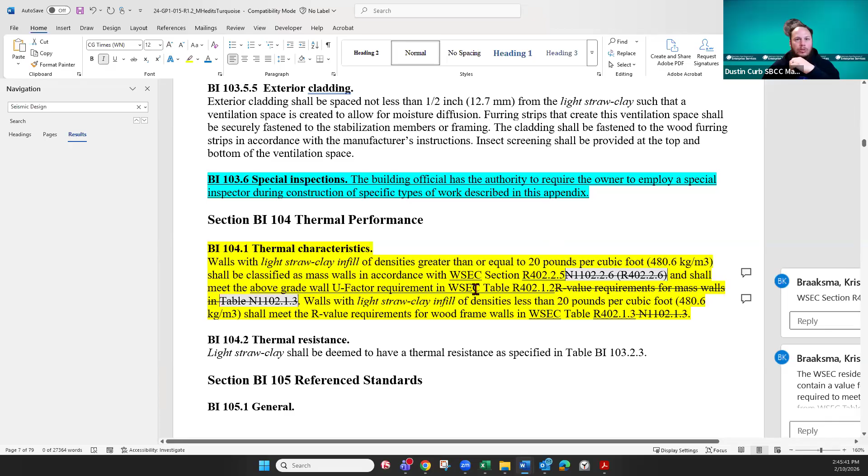We're here in Appendix BJ now. I'm changing this one to reflect the one that we had up top. And then that's shown as all. So let's see, struggling with the track changes to make it all apparent. Give me one moment.

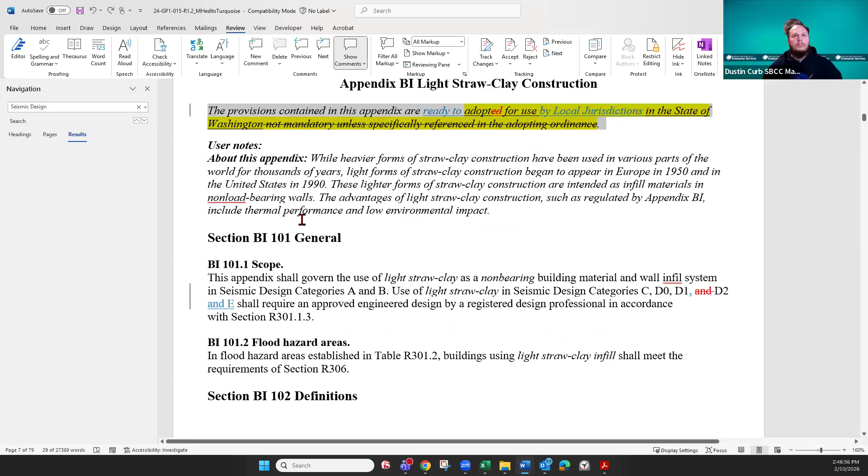Back to the top. Grab this. Was that for me? Okay.

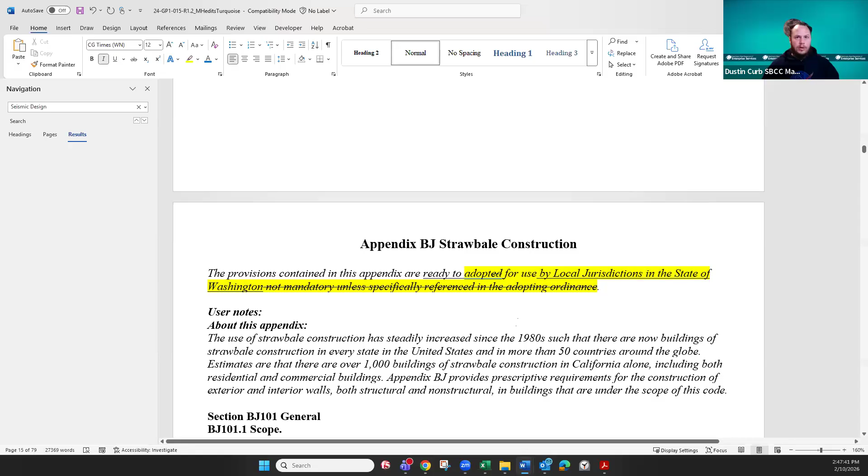Okay, that's not colorized, but I do believe it shows the changes for the group. And as I do finalize this draft, I'll make sure it's matching to the top one.

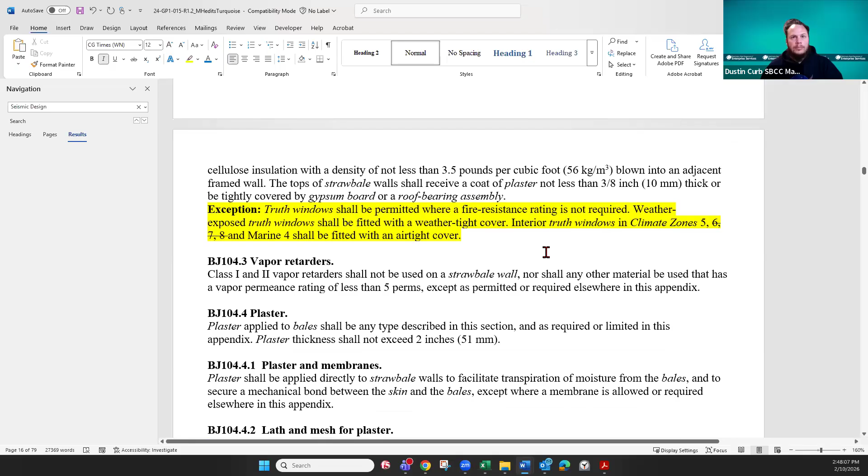We have here changes to the climate zone listings for state of Washington. More climate zone changes and Washington Energy Code references. We have another special inspection section here in Appendix BJ.

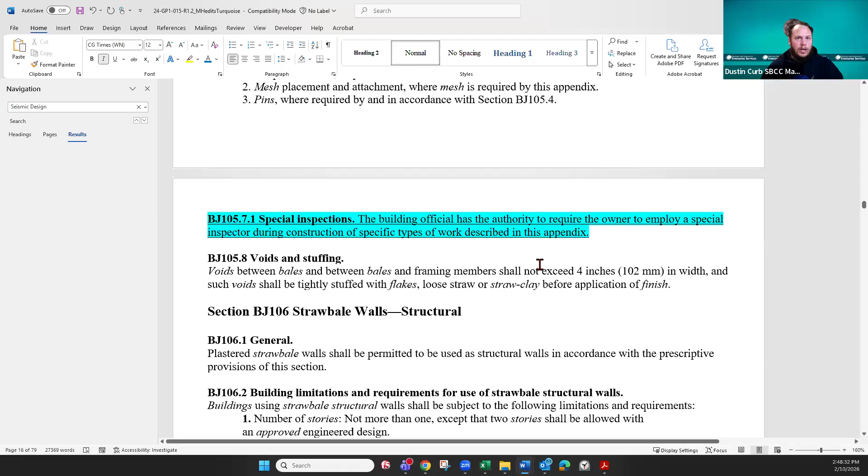And let me run back. I believe BJ 105 was the one where we did not change any seismic design category language, 105.2. I'm wrong, it's the next appendix. So...

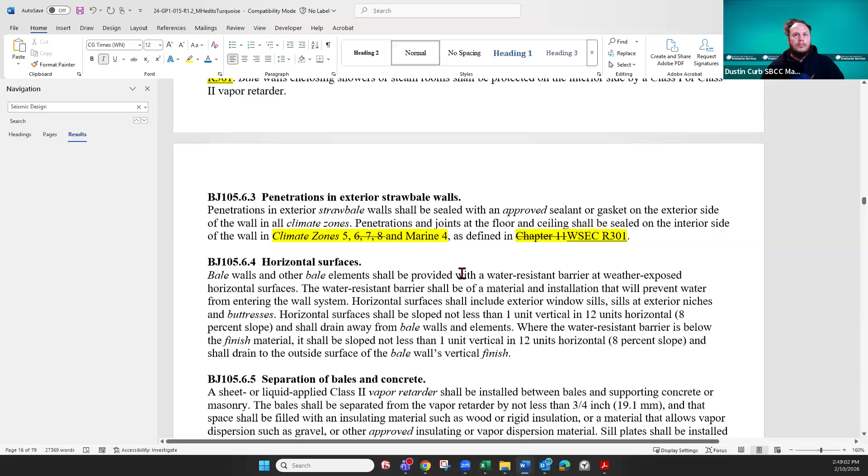Change from international code to Washington state code. Same here. With the statement there updated.

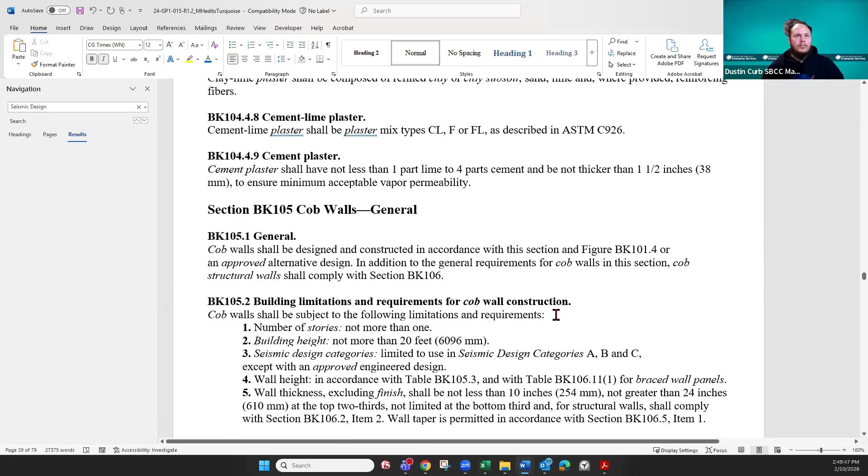Here's the one where we didn't change the seismic design categories to add E. You have the changes of the climate zones and references to Chapter 11 updated to be Washington Energy Code specific. Special inspections for Appendix BK.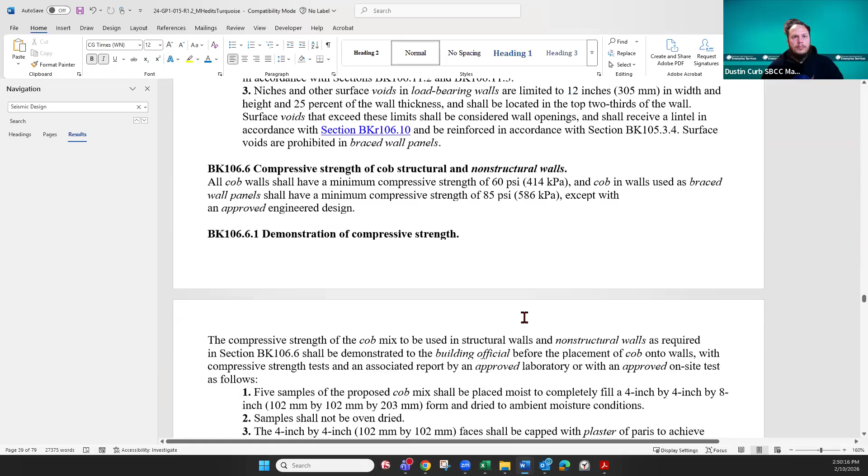A change from International to Washington State Code. Same thing. Same thing. Have changes for the Energy Code references.

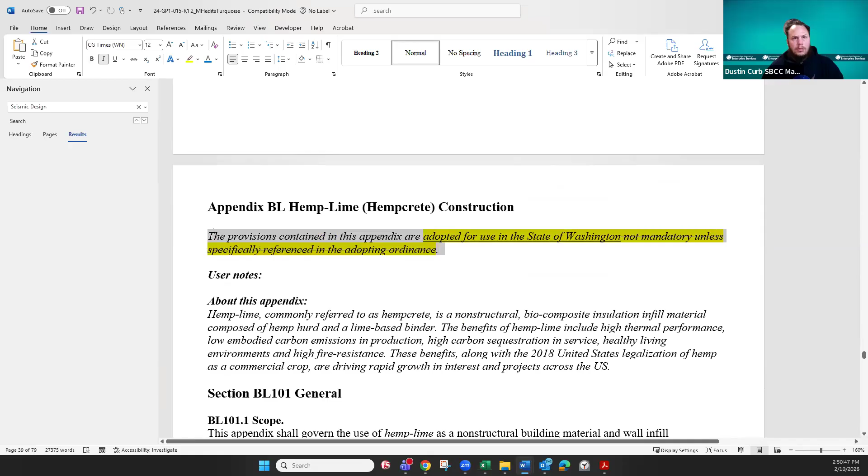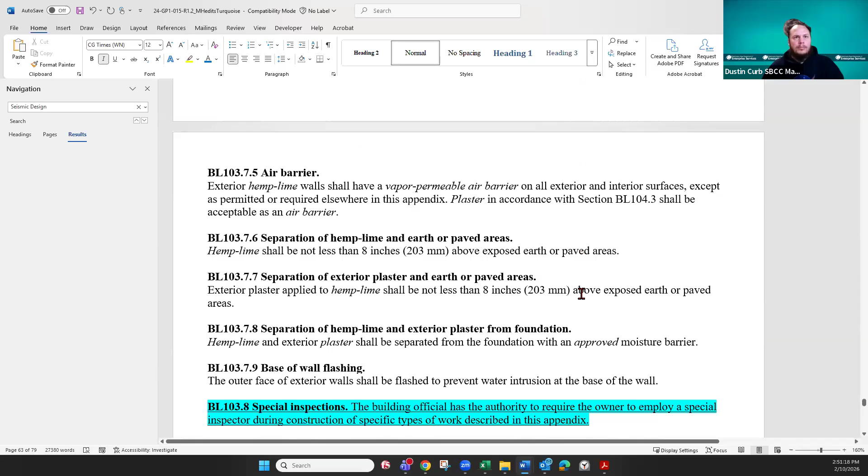We changed or added seismic design category E to BL. Have changes for the Energy Code references for climate zones. Special inspections again for BL.

And then the fire resistance rating, new language added in here. And we have more Energy Code references. And that is a quick review of the changes from the original proposal to today's starting document, and also including today's changes.

All right. So do we have any further discussion on the motion? Ken, is this going to be called revision 2 then when you're documenting this? Yes, so the motion has revision 2 in it?

Correct. Would that be a friendly amendment, Quinn, to approve, ready to approve, to adopt appendices R2? Yep. And I think Annie and Patrick were okay with that too. Yes.

Okay, any further discussion? All right, so the motion is to approve these appendices as ready to adopt appendices. All those in favor signify by saying aye. Aye. Aye. Those opposed? All right, that motion passes. Phew.

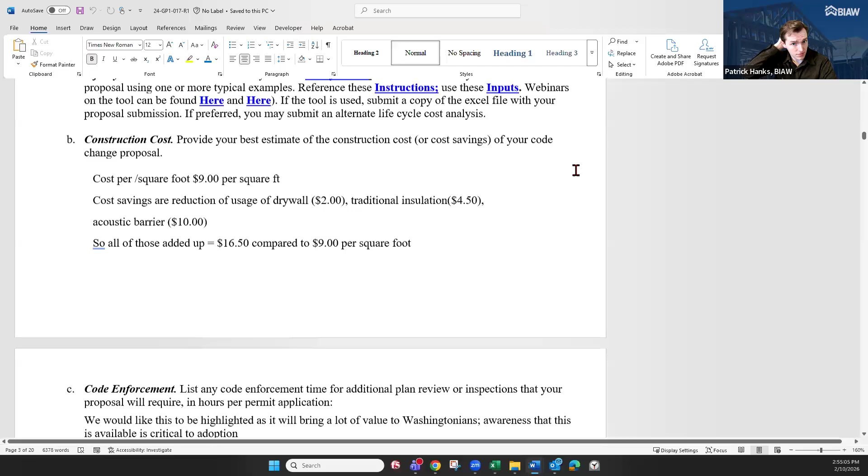Is there any discussion on this? It didn't seem like there was enough appetite for a statewide adoption, and we've been putting off discussing the last proposal for the other meeting, so I think we should probably prioritize that. Gotcha, for the modular, I respect that. I respect the floor, thank you, Patrick.

And yeah, okay, so do we need a motion on that then, Dustin, or? All the other ones do have a motion, so we should make a motion to deny this one moving forward. Can I get a motion for that?

Well, do we need to? Because my proposal earlier included BL as a... Right, so I don't know, but if we need to... Can we just table this one indefinitely? Yeah, I think we can table it. I'll make a motion to table indefinitely. Second.

Okay, do we have any further discussion on the motion? All right, all those in favor of tabling indefinitely signify by saying aye. Aye. Aye. Aye. All those opposed? All right, that passes.

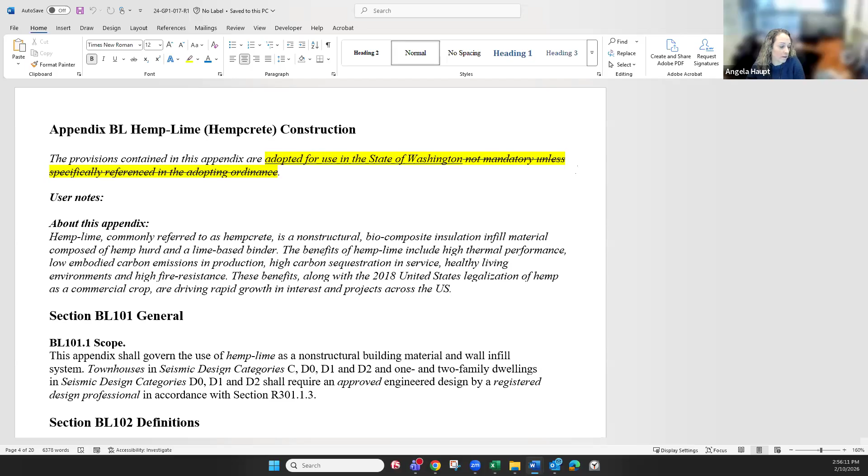What time does this meeting go to? We have it scheduled for another 3.5 minutes. Oh, okay, I thought you were gonna say hours. I was like, wait, what? It's not on my schedule. All right, so then...

I'm thinking that we're probably gonna need to do number 6 in our next meeting and hopefully accomplish that in one final meeting. Unless somebody wanted to make a motion on this one at all, but that's unheard of, not talking about it first. I've got 30 minutes if we want to let the proponent, if they're still on, speak to it, and then we can try to give them some feedback before the next meeting.

I am available to extend. I'll go ahead and make a motion that we extend this meeting 30 minutes. I'll second. Okay, any discussion?

Yeah, it's Ken. I need to drop off at 3, so I won't be available. Okay, this is Josh Mergens, I will also need to drop off at 3. Will we still maintain a quorum? I think we should. Yeah, with those 2 seats dropping off, we'll be okay. Is anybody else gonna have to drop off? This is Dan. I need to drop off, but I'm not part of the quorum, so. So it depends on how long this discussion lasts, because I do need 30 minutes. We're doing till 3:30. Okay.

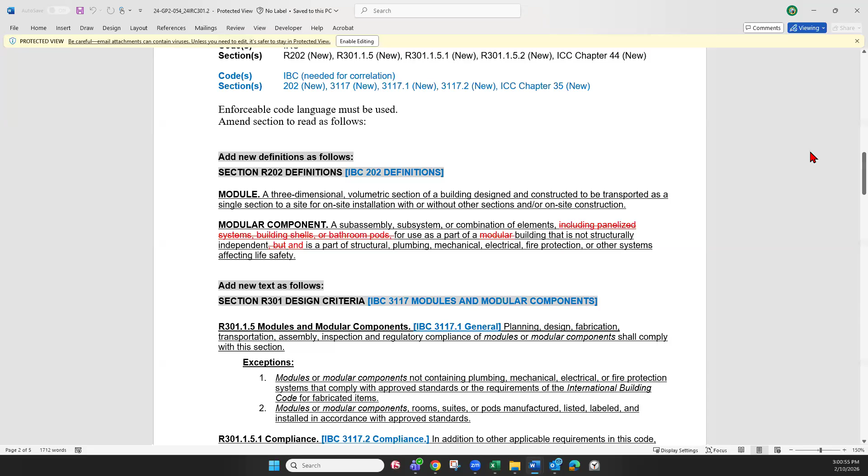The standards are by ICC, MBI. I guess MBI would be Modular Building Institute. Speaking from memory here: 1200 is more of the design standard, 1205 is more for the enforcement and jurisdiction adoption, and I believe 1210 focuses more on MEP. I know I'm not going into depth on that, but I think I'll stop there.

You can see the language below in the description if you scroll down after you're done there. I put it word for word in the ICC proposal and then added some kind of state context in blue for the proponent. Okay. Ken?

Okay, one quick question. Are these considered structures? And the reason I ask that is just in the fire code, applying the residential code. And the only way I can use the fire code for like fire flow requirements access, it says structures. So are these considered structures?

I'm not sure if I fully understand, Ken. I mean, yes, just as a little more context, there's a current bill in the legislature to help L&I. My interpretation is adopt these standards also in their rulemaking, so this is trying to align with that by putting it also in the code.

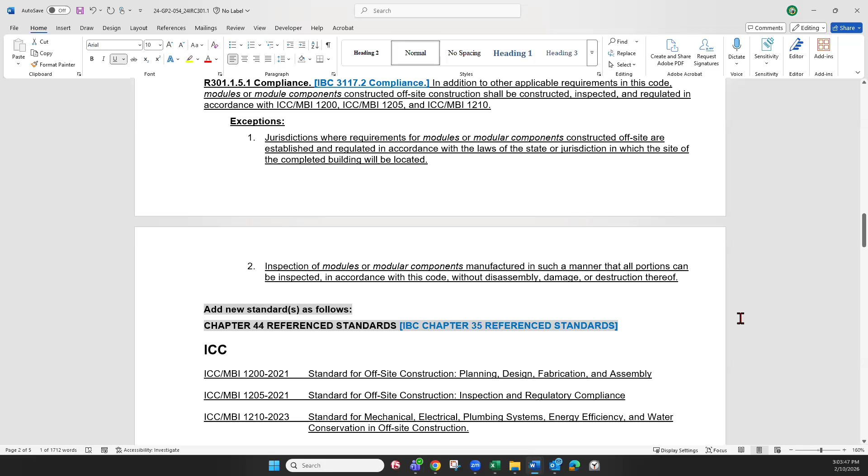So just if you scroll down now, just to complete that thought, the justification is in the packet there. So the ICC reason, and then I think at the bottom I put in blue some context.

Ty? Sorry, thanks Angela. So my question is, are we going to be stepping on toes for L&I? They usually do manufactured home prefab stuff, so by adding this to the IRC, are we digging into some of their stuff?

If I may, Chair, no, this has been coordinated with them. I've met multiple times with them in other forums, and they're aware that we're pushing this through also. In fact, I think it could help them if they're able to reference this when they do plan review from the actual codes, but they are asking for rulemaking authority to also put it in their rules.

My question is, this is for basically pre-manufactured parts of a structure. It's not a modular structure like L&I currently has jurisdiction over, right? It's just basically like having the wall sections pre-done and brought in. Is that correct?

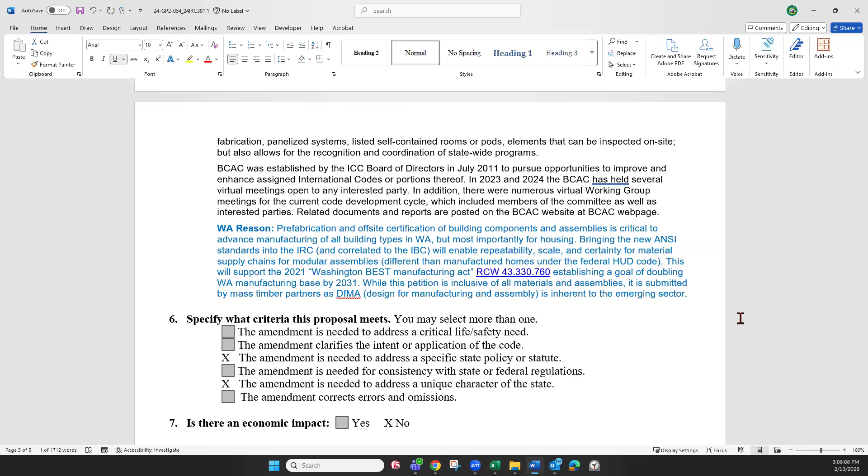Dustin, can you scroll up please? Yeah, maybe it's just easier to look at the actual language. I think that's all I have. Sorry, I don't have video for some reason, but you've hopefully seen me enough.

Patrick? How would a building official verify that a modular component was manufactured in compliance with these standards if L&I hasn't adopted a process to confirm that? Sorry, I missed maybe that first part, Patrick. How would a building official verify that the modular components were manufactured in compliance with these standards? Would there be a stamp? Would there be a certification that comes with it?

I don't know that I can speak wholly to that actual process. I do know the standards, I do know the design guideline that comes with it, but I'm probably not the expert in that. I will say that throughout this whole process, we have confirmed with L&I that they agree they do not have jurisdiction over panelization and don't necessarily think that's in their capacity to do so, even if they're given that authority, if that made sense. So the most common example here that I always use is this closed panel, a stick frame wall, panelized wall. Right now, it's common to have an open wall where it's inspected on site. This now brings some structure and reference standards into that process, whether it's, in this case, third-party review or the jurisdiction actually in the factory. And if anyone thinks I said something incorrect there, please help.

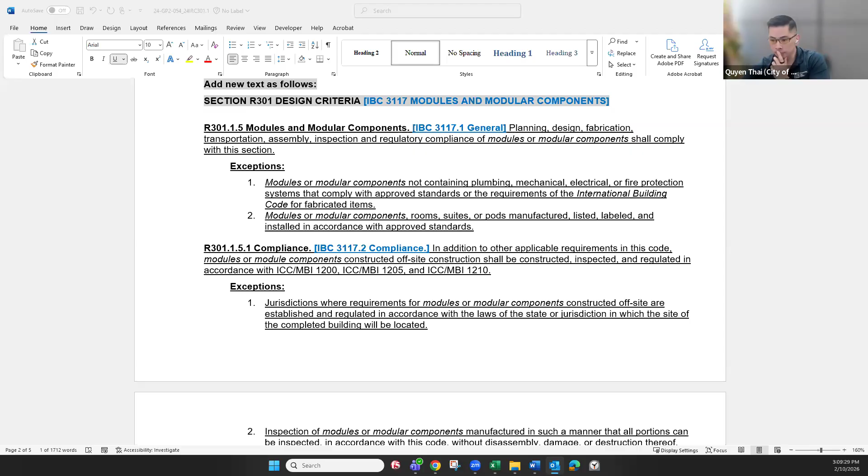And Chair, if I may. Yeah, it's exactly it. As we've gone through this process and learned how this can work in the state of Washington, and we as a collective, it's not just the Building Code Council. I've tried to be engaged with other groups and entities like the King County Housing Development Consortium, the HDC. That's kind of been another forum where this has been discussed.

And in that, I think it leans heavily on third party review, say an ICC-ES or a UL or other third party certification that would have to be coordinated with the jurisdiction and accepted. So again, my understanding, and I say this in confidence, this does not challenge or preempt home rule authority of the jurisdiction. But it also falls outside, a lot of this falls outside of the authority that L and I would have.

Micah? Thanks, Chair, for being recognized. And Todd, thanks for discussing this. I know it's not your proposal. I'll have to admit, I voted against this at the committee level, ICC for CH1 and CH2 this cycle, based on the fact that there's some nuances in here that shouldn't be in the code for the code official to regulate. One of those is actually in 301.1.5.

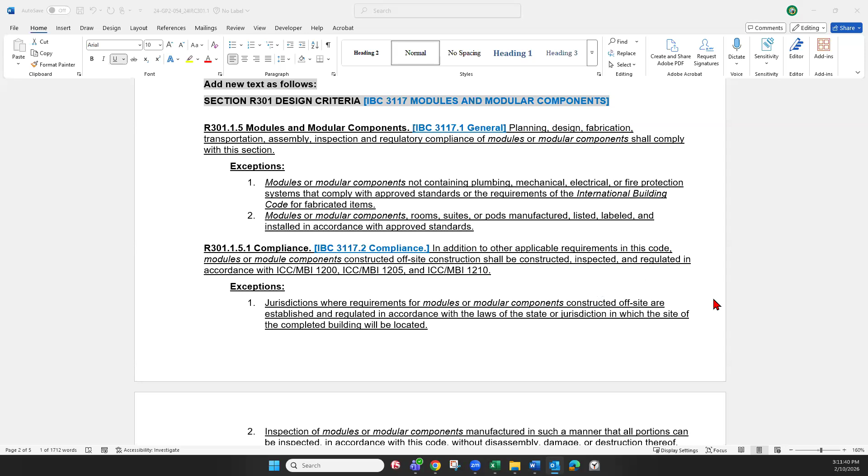Then another item that was brought up at the committee action hearing talked about the inspections, and this doesn't point you to the appropriate sections for special inspections when you get down to 301.1.5.1, item 2, and the exceptions. Those items weren't addressed at the code hearings, and there is some testimony against those. So I would like that to maybe be further evaluated, but definitely, if anything, we need to take out transportation. Code officials aren't going to look at that. They're not going to regulate it. It shouldn't be in there.

Thanks. Micah, where is that again? I'm sorry to interrupt, Chair. No worries. If you go back up to 301.1.5, this covers the transportation of these. We're not covering that in the code, or should not be covering that in the code.

I'll start raising my hand, Chair. If they're talking directly to you, it's fine. There you go. Thanks. Okay, that's interesting, Micah.

So what I can do, depending on what the tag wants to do, whether you want to table this one, I'm happy to bring this back, and also the ICC representative has expressed to me willingness to come talk through any of this or help with any amendments. So if that's a desire, I can bring that back to both the proponent and to the ICC level.

Micah, did you have another one? I just put my hand up. Todd, it's entirely up to the tag on this. Again, it was moved forward. I don't think there was many modifications at the national level, so probably as it's shown, it's going to go into the code, but that doesn't mean it's clean and accurate. But I did want to voice that I did vote against it at the committee action hearings on the committee. Thanks.

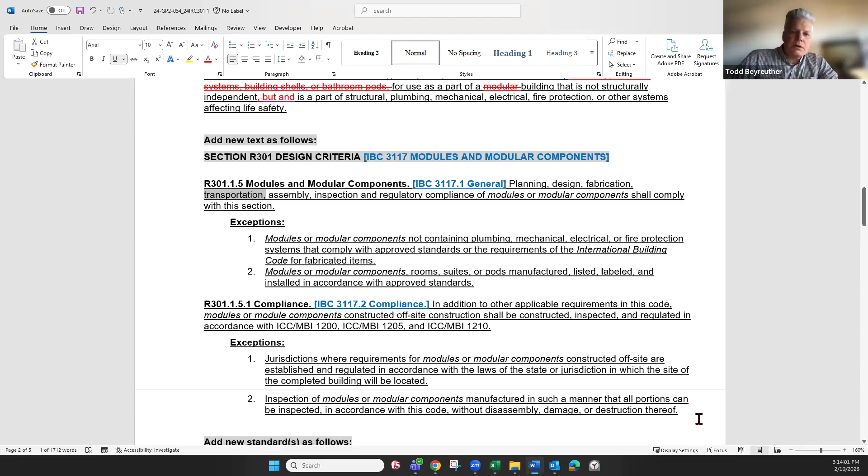So you're getting into, I see, because it lists energy efficiency in there. Correct, I just don't know what it says. I haven't looked at that document. Yeah.

I guess I've never thought of it as preempting the rest of our codes, but I think it's a valid question how that's addressed. Yeah, because it's not necessarily preempting, but it's just that since it's a closed system, they're certifying that it's meeting our code. Somebody's certifying it's meeting our code.

Yeah, Patrick? Yeah, I generally don't love bringing things forward, trying to jump a cycle. I think it creates extra work for us when we review existing amendments and then trying to compare significant changes.

However, I have heard from builders that are very interested in being able to have panelized walls or components that are stamped and approved and they can just immediately use, especially if it can incorporate energy code compliance. However, I think this is a very tricky area where until we get sort of everything regulatory, statutory moving on the same page, allowing L&I to stamp and inspect and have a stamp that it meets the state codes, and then local jurisdictions can just quickly approve it.

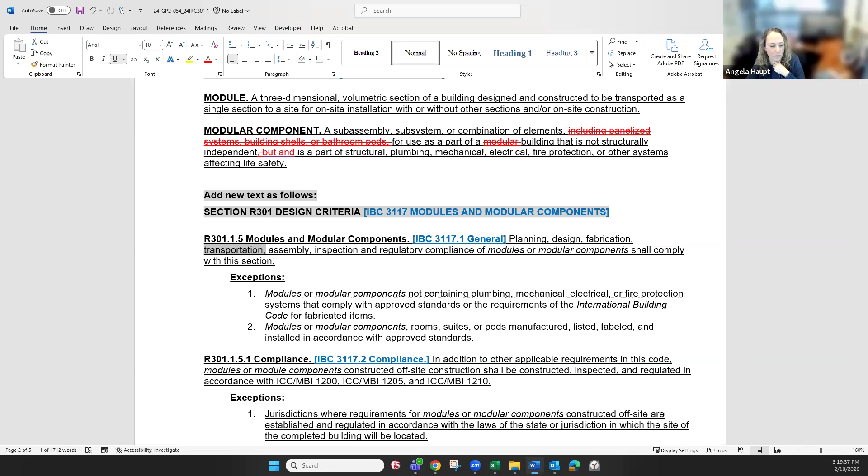I just wanted to point out, in the standards, I was looking at MBI 1210, section 404 for plumbing. It says plumbing systems and components installed off-site shall meet the applicable requirements outlined in the IPC or IRC. We don't adopt the IPC. It also, I believe, in the energy conservation section refers to the IECC. So these are things in these standards that would have to be addressed to make sure the standards refer to the codes we actually use, versus just the ICC codes we don't adopt. That's something to keep in mind with these standards.

Quyen: basically, along with what Angela is saying, this is just a copy and paste from the proposal at the model code committee action level. We should revise it to be more fitting for Washington, kind of like what Micah said about transportation, and remove some of the line items there. But overall, I don't see a major issue, just some minor stuff we could modify.

If it's the will of the tag, I will see these folks at IBS next week in Orlando, so I'm happy to give them homework.